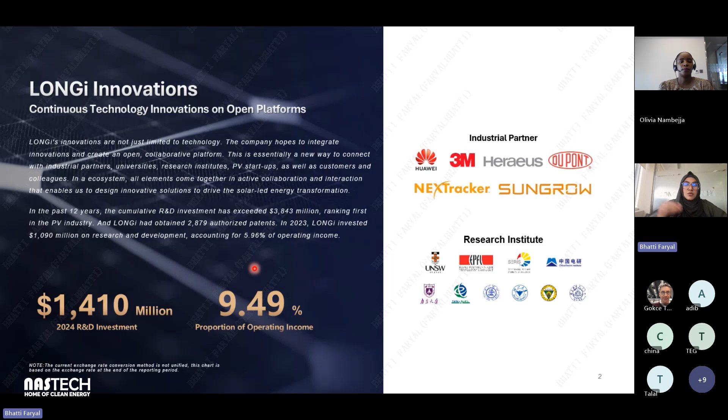And we back our customers' confidence in our products by doing very detailed research and development. The numbers on the screen show our dedication towards this research and development: almost around 10% of our operating income we invest in research and development. We are doing research and development in the labs, and in the field, to assess exactly what challenges and problems our clients are facing. Because we are all well aware that solar is picking up pace faster than ever, and so are the challenges with it. So we have to keep on solving them as we go on bringing innovation to the market as well.

So as a result of that research and development over the many years we have been in the industry, we have achieved a lot of world efficiency records. And the major highlight for the past 2 years and this year has been crystalline silicon technology with the perovskite tandem. That has been the major highlight by LONGi, and they have been the efficiency record holders with 34.6%.

And this year, just in the SNEC that happened in the previous month, we have launched another world efficiency record with the current crystalline silicon technology, reaching the high efficiency of 27.81%. So this is also another efficiency record by LONGi.

So this is actually a representation of our dedication towards research and development, and whatever we bring as a company, as a solution provider to our customers, is not just a race in the PV industry to win more projects or anything, but we want to bring value addition. The value addition, what change, what difference we can make for our customers to give them the best experience that is going to last for the coming 25 to 30 years and so on.

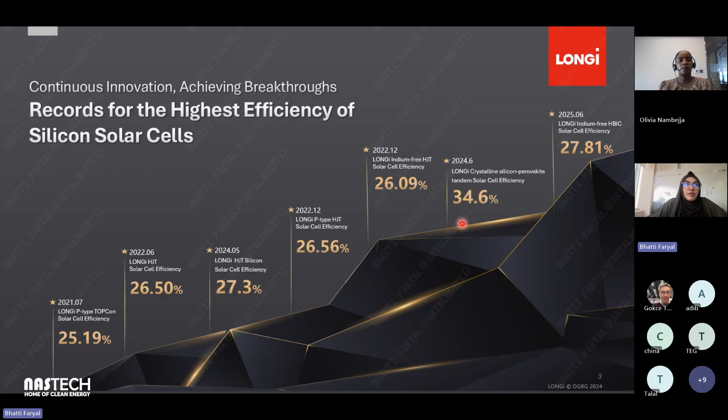We also have an application named LONGi Arabia for our Middle East and North Africa region. It is a one-stop destination for any kind of solar project or techno-commercial query. You can log in, download it, and get your problem solved in one click.

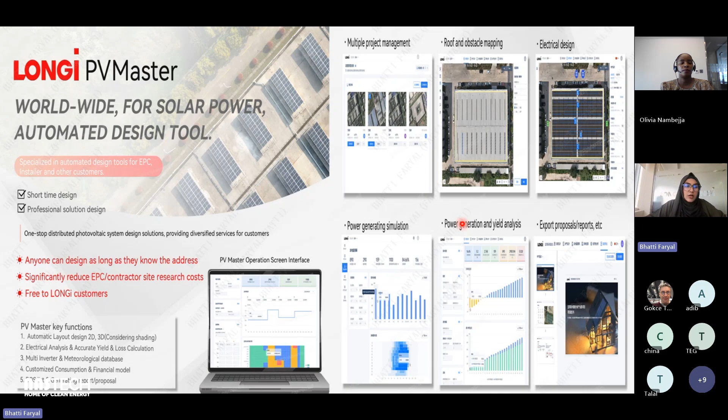Then we also have our own techno-commercial software that provides you a platform where you can do comparisons. You can also analyze the area, the layouts, everything, you name it. LONGi PV Master can do it. So we have made this software for our clients to make their work easy in making the right decision before choosing the right product.

So now let's dive into the main topic and main agenda of this webinar. I'm proud to give you Hi-MO X10. This is one of the highest efficiency products and our mainstream product, which was launched at the end of last year. And this year we have been improving the technology itself. We don't just leave the product and move on to the next, but we try to improve it and bring it to the highest level of efficiency achievable in mass production.

So talking about our Hi-MO X10, how is it different? As I mentioned, we want to bring value addition to our customers to give them the best experience. We have done our research in the field as well, and the result is that the major problems that can lead to the failure of PV modules are hotspots, which are caused by shading, soiling, or any kind of external damage.

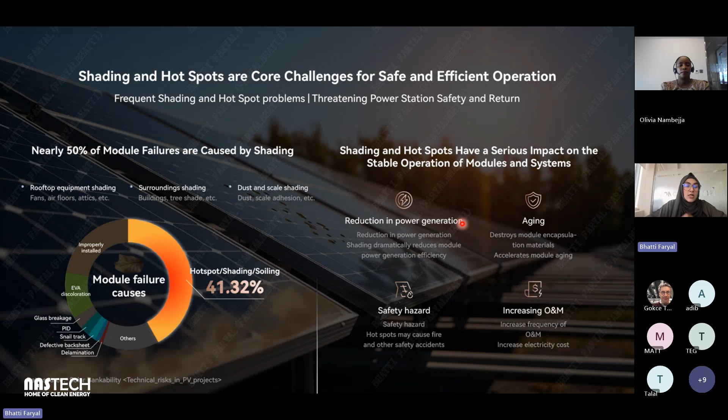So for this major failure associated with PV modules, LONGi feels it is its responsibility to bring a product that can solve this major issue that brings risk to project owners, all the stakeholders, and also the developers and policymakers that are investing huge sums in their projects.

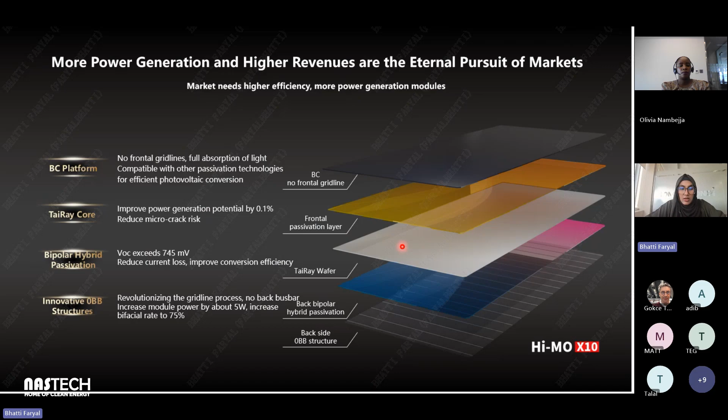So we have built Hi-MO X10 with our highly efficient wafer, which is called the TaiRay wafer. The bill of material that we are using is of the highest quality in the market right now. That is going to bring the best product with the highest efficiency and durability for our customers. This is the overview of our Hi-MO X10. The technology that we are using is N-type integrated with back contact cell technology.

Back contact means that all the contacts, the grids, the bus bars are moved to the back of the cell. So that is called back contact. This is our second generation of back contact. The first generation was HPBC 1.0, which we launched with Hi-MO X6 and Hi-MO X6 Max a couple of years ago. And now we have taken the next step to the second generation, which is HPBC 2.0.

The cell efficiency achieved with Hi-MO X10 is 26.6%, and the module efficiency is 24.8%. This is the highest module efficiency present in the market right now for mass production. Then the first year degradation is 1%, which is the standard of the PV industry. The important points are the linear degradation and the temperature coefficient. The linear degradation of our X10 in comparison to normal TOPCon is 0.05 less.

The normal TOPCon is 0.4%, while the X10 is 0.35%. It means giving you higher generation over the next 30 years. That is, in simple words, I would say, giving you higher savings. And that's what we're going to see in the further slides as well.

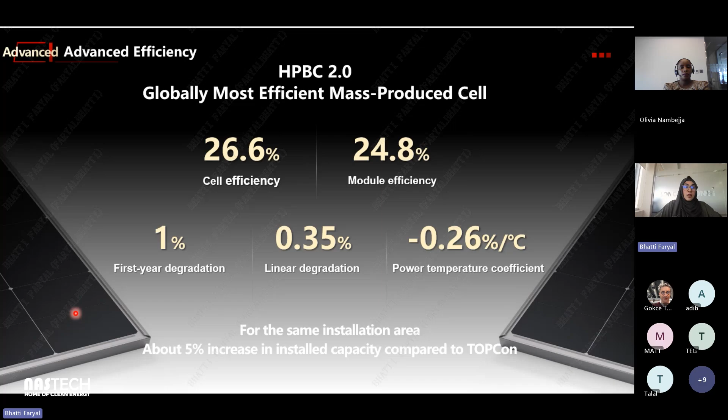Lesser, the better. So for Hi-MO X10, it is 0.26%. If you compare it with the normal TOPCon, it is 0.28. So you see the difference of 0.02%. That makes a huge difference per degree Celsius. So that also means higher savings, higher kilowatt hour generation for the next 30 years.

So these are our new releases. We have 54 cell, we have 72 cell monofacials, we have anti-dust 72 cell monofacial, and we also have the bifacial module as well. So you can see that we have this wide range of products in our Hi-MO X10 family. The reason is because we know that the distributed generation systems, the C&I projects, are not all the same. They have their different requirements. Some require high efficiency modules, some require bifacial modules, some require monofacial modules because of the load bearing capacity of the roof. So we have made a series of products for the right applications.

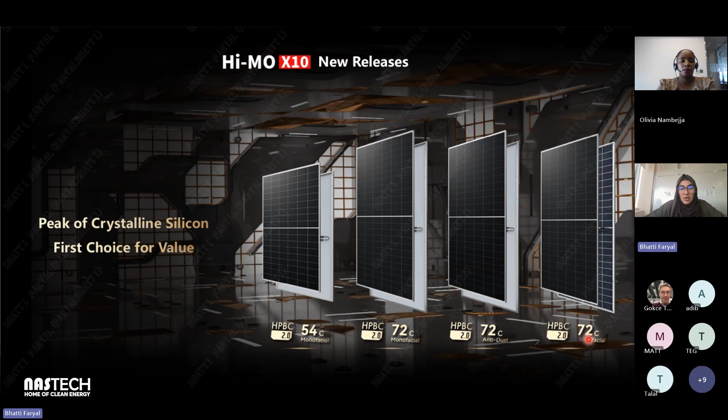So that's what we try to communicate and educate our customers: okay, this is your application, we understand your project, and this is the right product for your project. So that you can avoid all kinds of risk, avoid all kinds of degradation, or remove all kinds of risks that are associated with only one type of product. That is the right way to go, specifically with this business unit of the PV industry, which is distributed generation PV projects.

So I haven't put a lot of data in this presentation, but I have tried to keep things simple by just putting in the videos that are going to give you a clear picture of our product. So the first unique feature of our Hi-MO X10 is the anti-shading feature. As I mentioned before, the hotspot problem we are solving through the anti-shading feature. And this video is going to explain how Hi-MO X10 is going to solve that. So let's get into it.

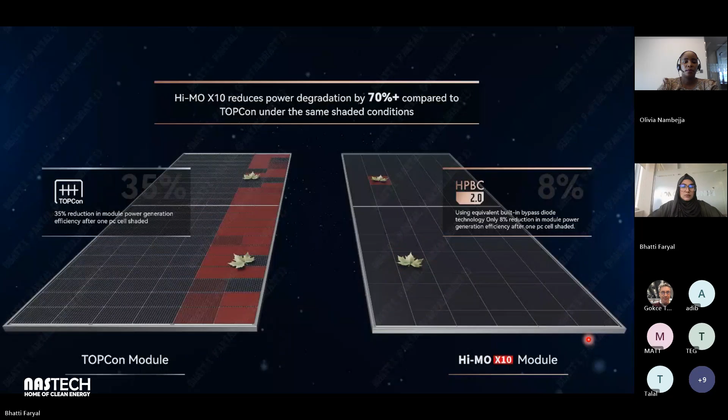So you can see here, Hi-MO X10 and the normal TOPCon module in shading conditions. Only one cell is being shaded due to this leaf here, and the other leaf is shading just one cell. And in this normal conventional TOPCon module, the power is going to be reduced by 35%. If one cell is shaded, the whole string of cells is going to go into zero generation mode, and the bypass diode that is present here is going to become active. So overall, there is a 35% reduction in the power output.

But in Hi-MO X10, whenever there is shading on just one cell, only that cell is going to be bypassed, and the rest of the cells in that series are going to perform at their 100% generation capacity. And how is it happening? Each cell is designed in such a way that it mimics the bypass diode, so that only that cell is bypassed, and the rest of the module is performing at its maximum efficiency. And if you compare the output degradation, the degradation is only 8%.

And to back up our claims that our modules are going to have a reduction in output in shading conditions of less than 10% or less than 5%, we have a third-party certificate as well that has tested our Hi-MO X10 in shading conditions, to tell you that what we are claiming is right. So we do have a backup by a third party, by IEC test standards, to tell you how the Hi-MO X10 is going to perform in certain conditions. So this is going to solve the problem of hotspots.

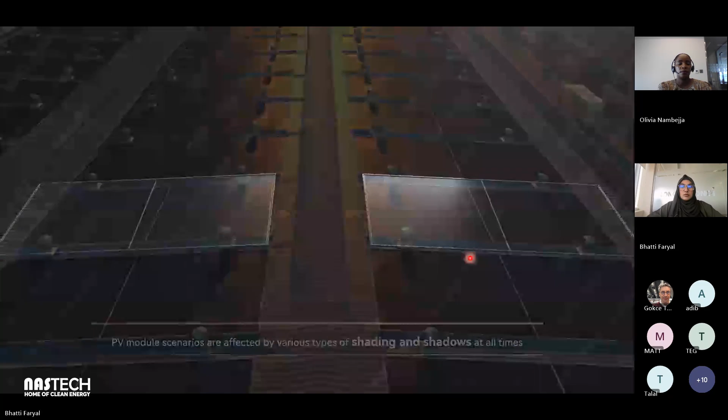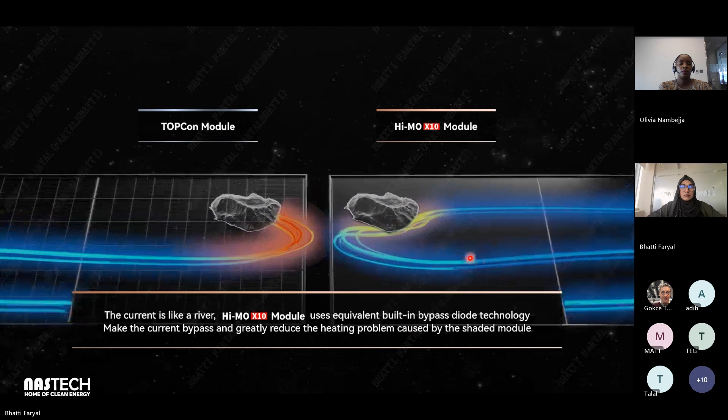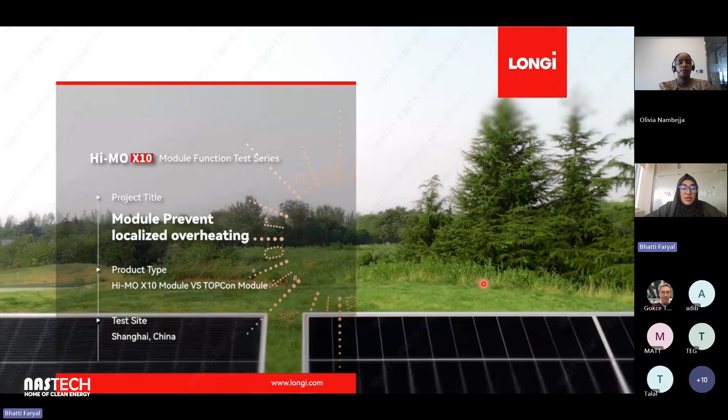So I guess this video was self-explanatory. No need to go through more. You already know that this has caused hotspots, and the Hi-MO X10 module has passed the disaster test as well. And this video is going to show you that we have tested it with our PV modules live, using a thermal imager, to give you a clear picture of how much temperature increase can lead to hotspots.

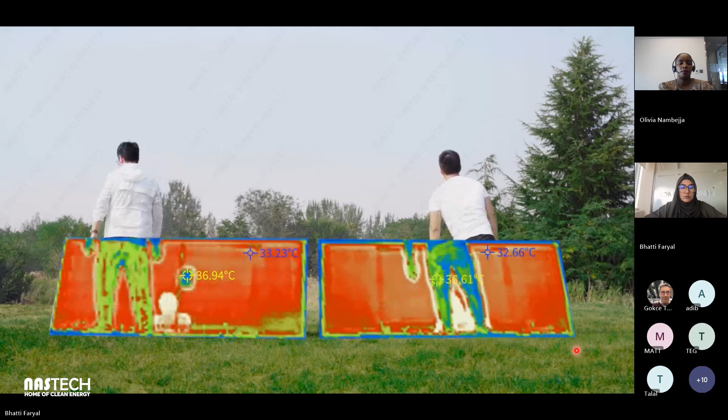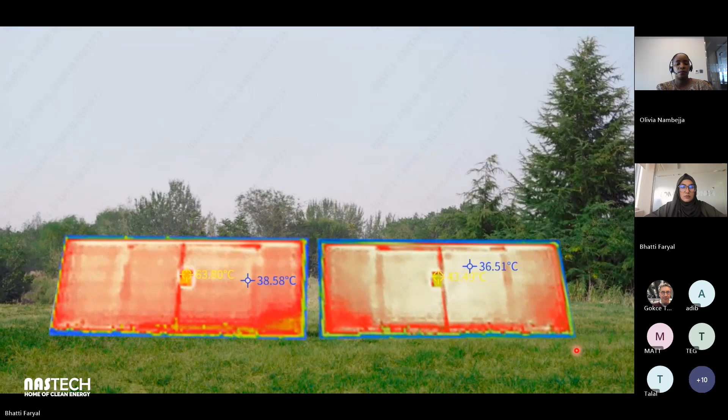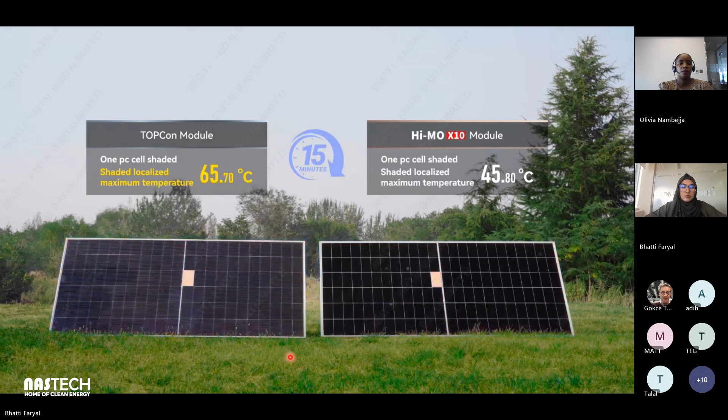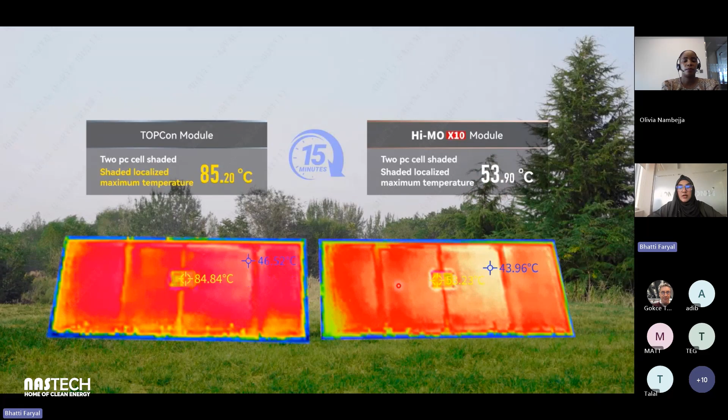So you can see the difference. Hi-MO X10 is just 45. It's 65 for the TOPCon module. Now we are increasing the shading. And after 15 minutes, the temperature of the shaded area has reached 84 degrees for TOPCon, while it is still around 53 degrees for Hi-MO X10. The environmental temperature right now, for normal modules, is 45 degrees. Further increasing the shading.

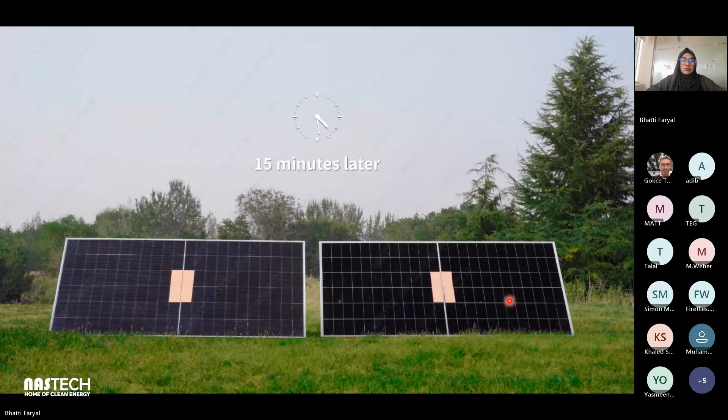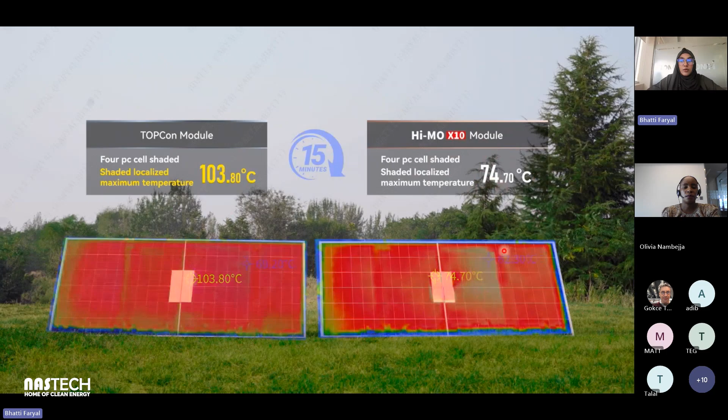So you can see that the TOPCon module temperature for this localized shading is 103, while for X10 it is just 74. The environmental is 62. So you can see the difference. So the conclusion is shading is very, very bad for a PV module. That's for sure. Soiling is very bad for a PV module, but we cannot always avoid this kind of shading. So the product itself is smart enough, intelligent enough, to take this risk out of production and give you the best and safe output throughout its life.

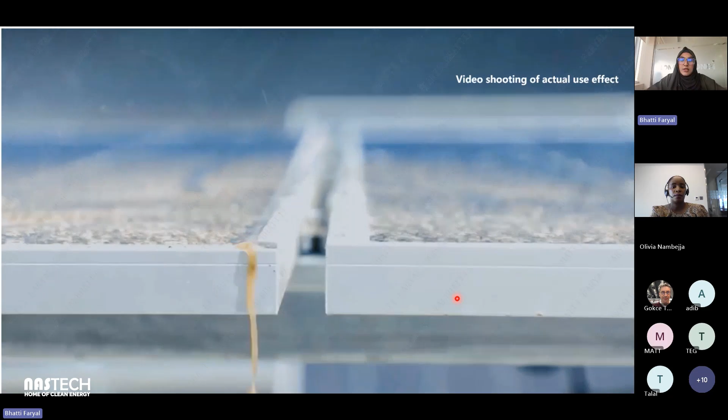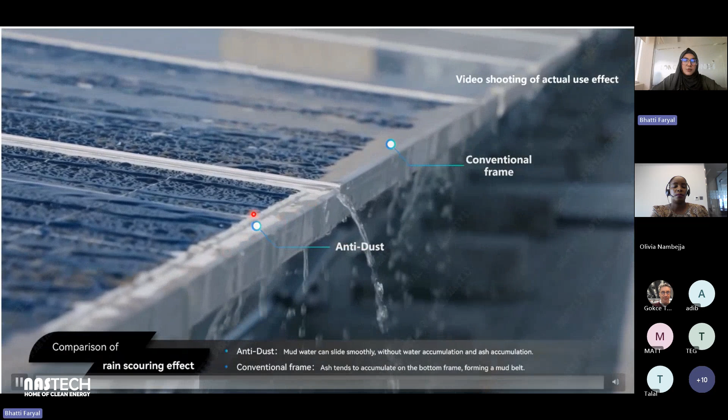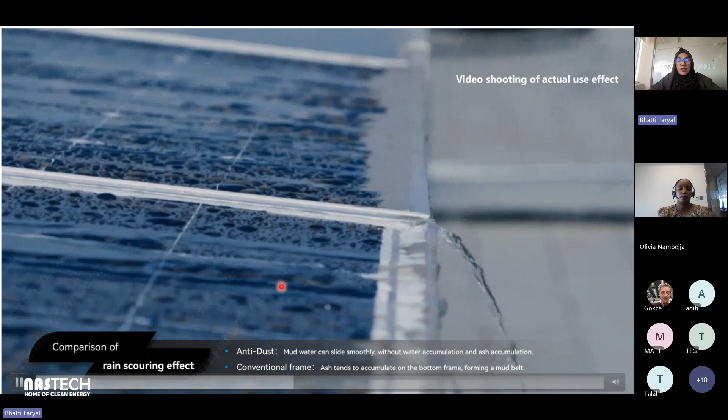Next, we have another customized product of Hi-MO X10, which is the anti-dust product. This video is also self-explanatory, and you can see what variant we have in this Hi-MO X10. So this is our anti-dust frame, and this is the conventional frame. The anti-dust frame is customized with the same cell technology. Everything is the same, just the frame is designed so that it is level with the glass, and any water and dust slides off the module even at a very low tilt.

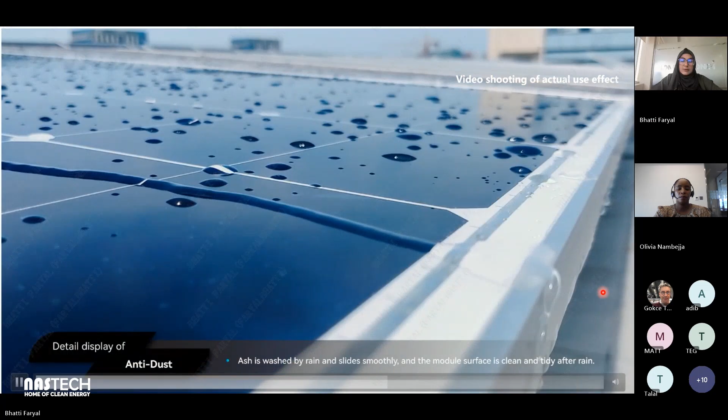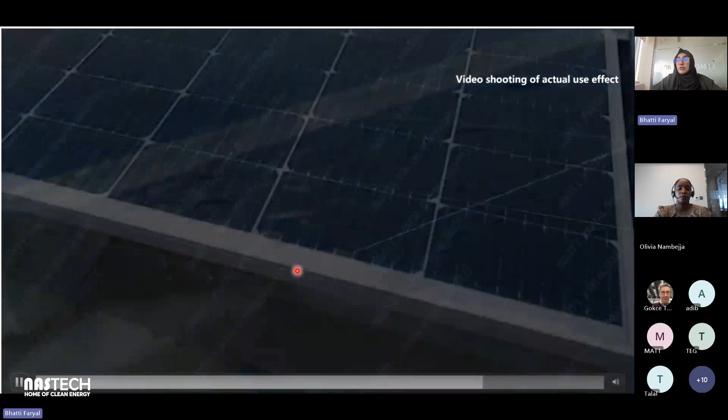Here you go. And on the other normal module, the sand has settled at the bottom. This causes almost 28% energy reduction, output reduction, in these kinds of scenarios. So X10 anti-dust is solving your soiling and water problem as well.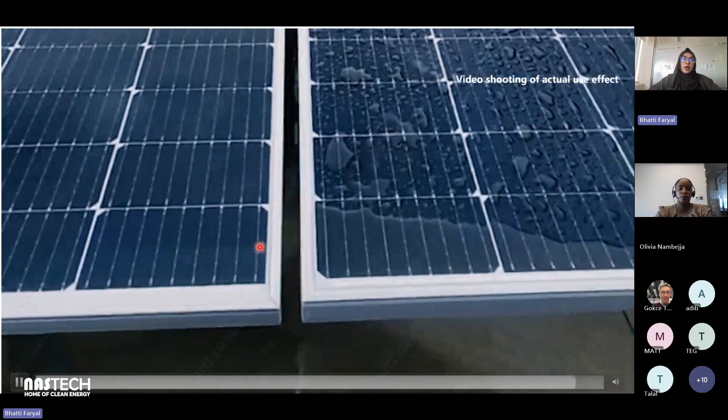Now about the NT-PID certification of Hi-MO X10. This is a very, very important one because most of us say, okay, we have a PID certification, but that PID certification is for PID-S. That is a separate one. PID-P is polarization type PID, which is much faster than the normal one, and it causes a high amount of degradation if not identified.

In simple words, the voltage difference is higher; the voltage of our PV module can reach up to 1500 volts. At high voltages, the induced degradation is higher, so these higher voltages are going to degrade your PV module. So it is very, very important that we use the right quality of material in our product that cannot be affected by these high voltages. Hi-MO X10 and our back contact cell module have passed this TUV PID test, showcasing LONGi's advanced anti-PID technology plus our detailed research and development.

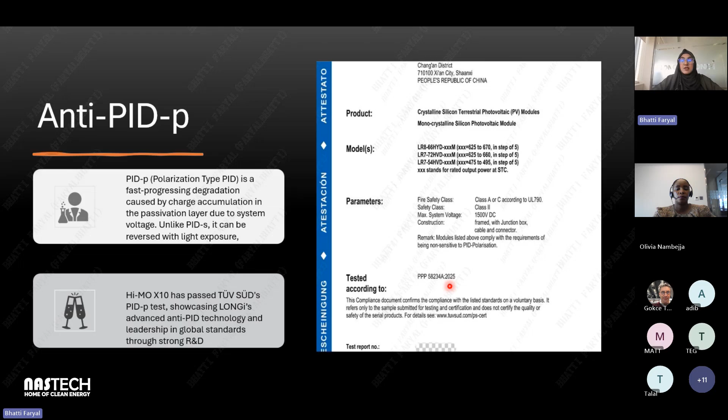We have almost 8+ years of experience just in our back contact cell modules. With all these challenges, we have achieved this certification by TUV, and LONGi is the only one with the certification right now.

So why is PID important? It maintains the module efficiency. So we need to have an anti-PID module to get the maximum efficiency. The long-term reliability, because if your module is experiencing this potential induced degradation, the efficiency is going to reduce, long-term reliability is going to reduce.

Then automatically there will be higher downtimes. It will cause a lot of damage to the module. Your output generation will reduce, and your savings, your selling to the grid for net metering conditions, is automatically going to be lesser in comparison to the X10 module.

In the harsh climate that we are facing right now because of global warming and all its effects, we need to be very smart to get the right product. We are facing very, very high temperatures these days. We are facing high humidity, especially in the MENA region. High voltage plus high humidity makes the best condition for PID to occur. So the product needs to be very suitable for these kinds of conditions.

Then the compliance with the IEC standard. LONGi has been the first one, and we foresee that in the coming years, maybe 5 to 10 years, this type of certification is going to be mandatory for PV modules because the climate has changed, the conditions have changed, and the product needs to be smart.

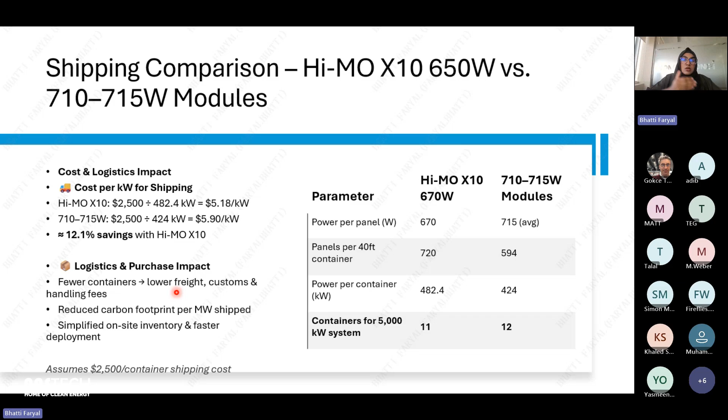One needs to consider the cost aspect of the overall project rather than just the panel itself. This is a very important point that stakeholders, financers, and developers need to consider when choosing the product. High efficiency, compact design, right durability, and all these certifications must be considered.

So we have this typical scenario comparing Hi-MO X10 with normal TOPCon. As my colleague mentioned, right now only the monofacial variant available in the market is with the same length measurement, 630. If you compare the Hi-MO X10 highly efficient module with the 630, the increase of power generation is going to be 8%, not just 2% or 3%. It's going to go as high as 8%.

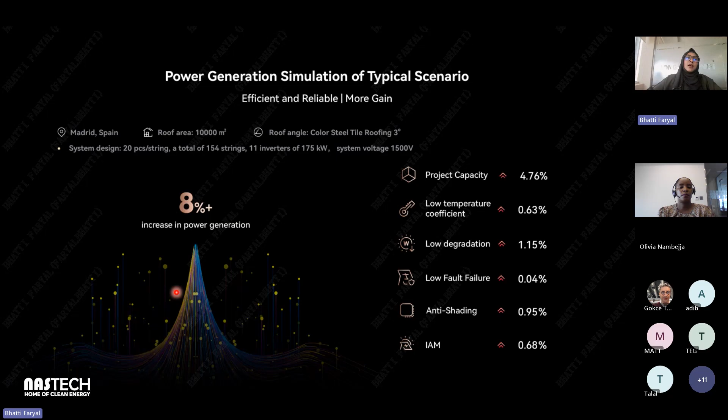The project's capacity is going to improve. Temperature coefficient is lower, lower degradation, less fault failure, and there's an anti-shading feature. Everything needs to be considered, and that gives you a higher generation of 8%.

Then the levelized cost is also very important. Whenever we discuss choosing a product, we always ask for the financial numbers, and the important number is the levelized cost. With Hi-MO X10, because of its higher efficiency, flexibility, and adaptability with the project, you get around 6.9% less levelized cost compared to TOPCon of 630. So this is a very clear example of the financial numbers.

The internal rate of return is 6.72% higher. It's 31.3 for X10, while for TOPCon it's 29.36. For the coming 10 years of generation and savings, you're going to get 8.1% higher numbers.

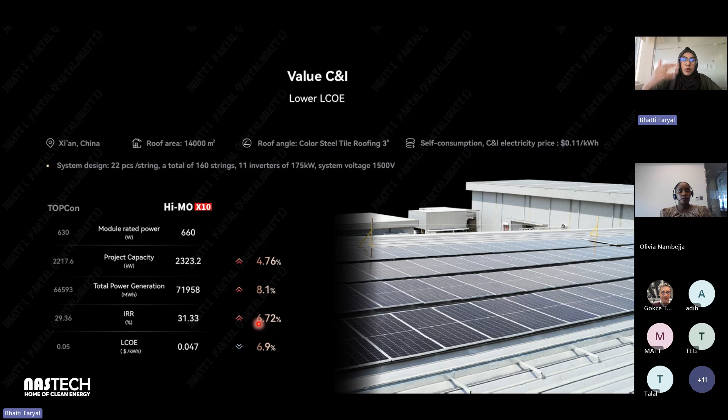All these numbers give you an idea that if you choose the right product with the right efficiency and flexibility, you're going to get a benefit not just for the first year, but for the lifetime. Hi-MO X10 gives you a warranty of 30 years, not 25 years, for its monofacial. So for 30 years we're going to save, and the savings are going to reach up to 8%.

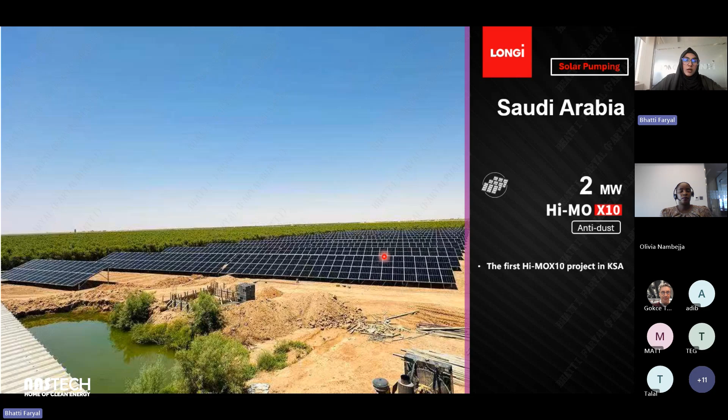Now we have some case studies of installed Hi-MO X10. The first Hi-MO X10 was installed in Saudi Arabia, an anti-dust design for 2 megawatts. Then we have our back contact cell, first generation, installed in Yemen, and now the project owners are saving around $600 per day in cleaning. So anti-dust is also a top-notch feature for your savings.

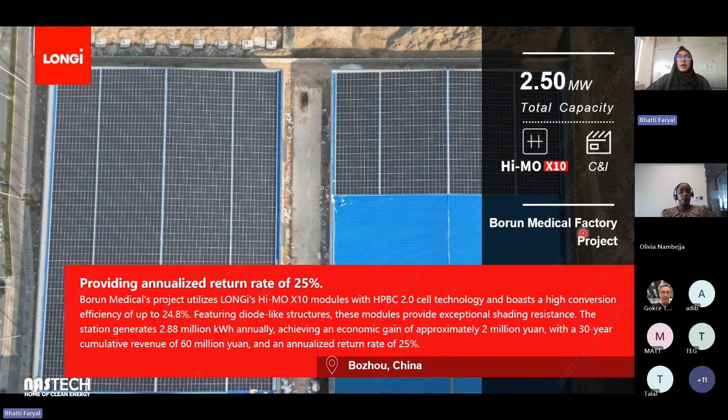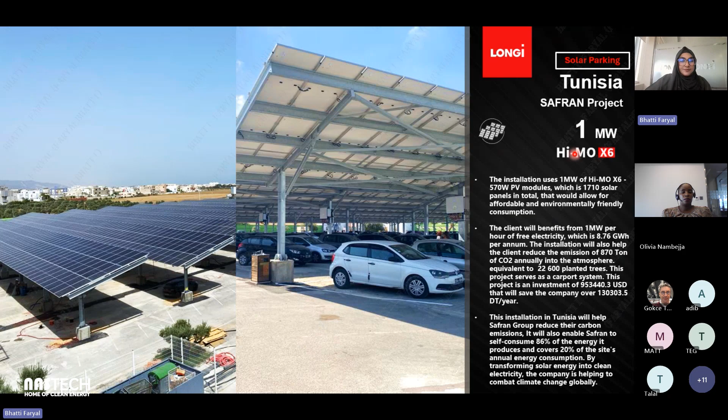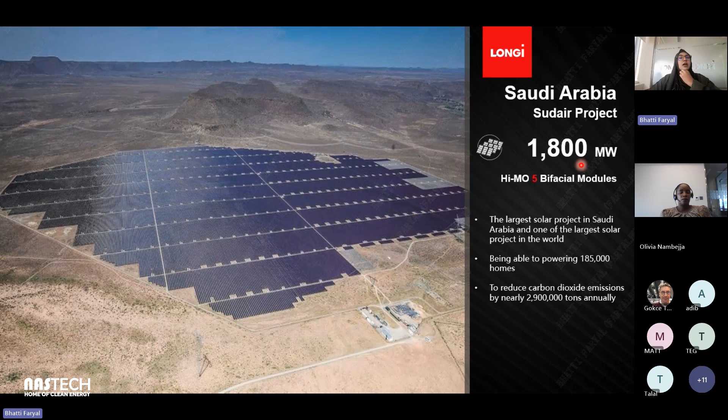Being LONGi, we also have a lot of large scale projects. In Saudi we have a big portfolio; I've mentioned a couple here, like 1.8 gigawatt of Sudair project. We have 2 gigawatt of NEOM 1-2 project in Saudi. Then we have the Qatar Al Kharsaah project of 800 megawatt, and 313 megawatt of the Garadagh project in Azerbaijan.

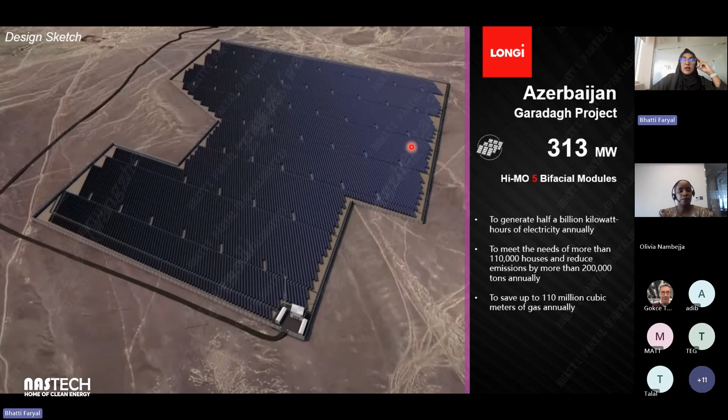Thank you very much for the presentation. It's really impressive, especially from our perspective, that you can fit more watts into the container, because the size isn't just growing but the efficiency is going higher, which is very important, because the total cost needs to consider the shipping, warehouse in, and warehouse out.

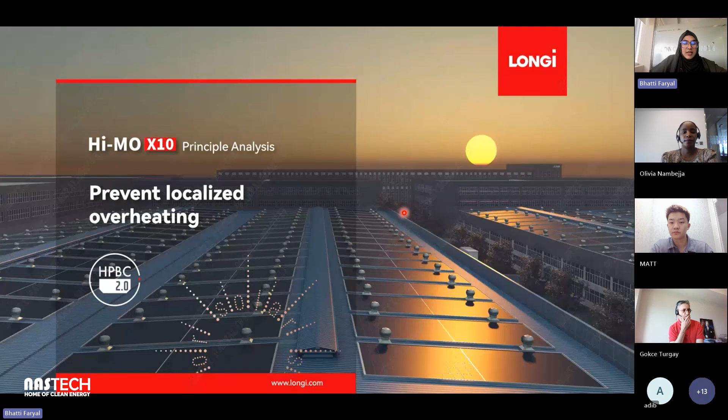Okay, so how it works is that our product, the Hi-MO X10, has cells manufactured in such a way that they mimic the bypass diode. So whenever there is a condition that shading has occurred on only one or two cells, only those shaded cells are going to be bypassed, while the rest of the cells in that series perform at their maximum efficiency.

So what is the result? The result is that the X10 is going to give you an output of 92% in this shading condition, while the other normal PV module is going to give you an output of only 65%. Normal PV modules degrade and give you only 65% output in such shading conditions. So this is the concept of the anti-shading feature in Hi-MO X10.

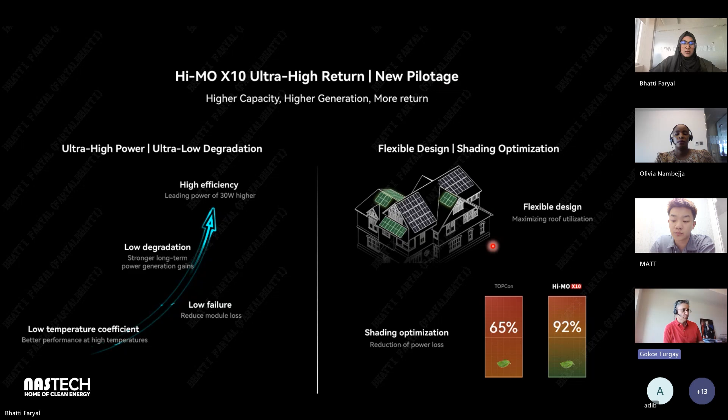I had exactly the same question as Mr. Talal: how much can the anti-dust feature reduce cleaning frequency? I wanted to ask also about the PID point, but yes, please.

So with our X10, I'll give you an example from a project, a real-time case study that we have done. With this anti-dust feature, the cleaning frequency, because this is a more dusty, soiling-prone area, for the different project with the non-anti-dust module, they were able to reduce it by 75%.

Got it. Well, I have one question. I mean, I understand from the presentation, but can we maybe mention where the anti-PID conditions, where PID will be worse, in which kind of environmental or geographic location? Can you give maybe some example?

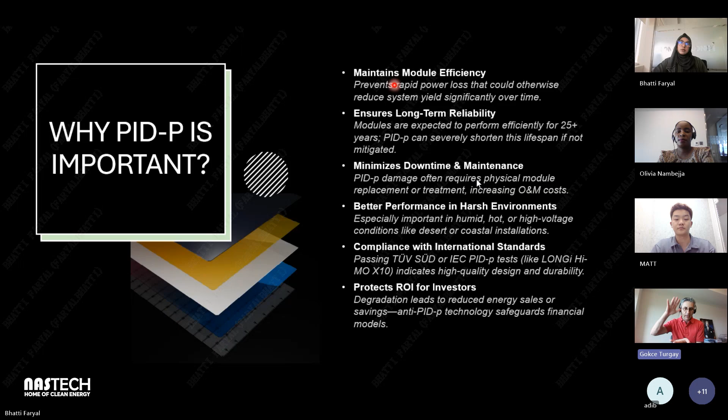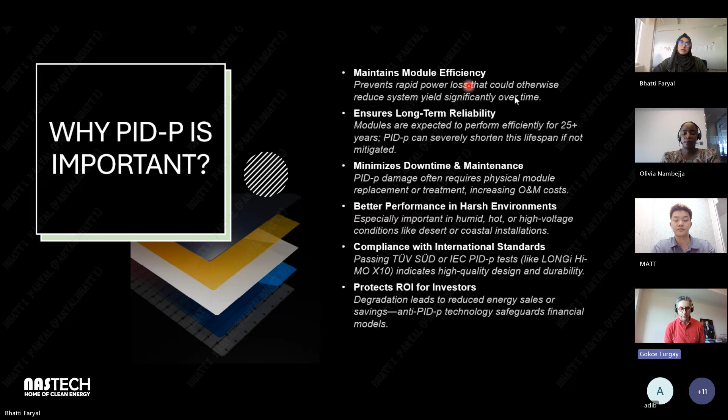But on a roof it depends on the type of roof. There can be a concrete flat roof that can behave like a normal floor - then you'll have a mounting structure with some angle, elevated, and you can put gravel or paint the ground white. But if it's a sandwich panel rooftop where you just put the panel directly onto the roof without any space, you're just increasing the weight of the roof for not much return, because there's no space behind the cell to get reflection into the panel.

That's why it's better to go with monofacial in that case, so you save a lot of weight. Monofacial panels are around 27-30 kg, while bifacial is like 40 kg - about 10 kg more per panel. So for a half megawatt project at 650 watts, you're looking at almost 8-10 tons weight reduction by going with monofacial panels. Totally agree - well explained, sir.

Okay, I think that's all. Do we have any more questions?